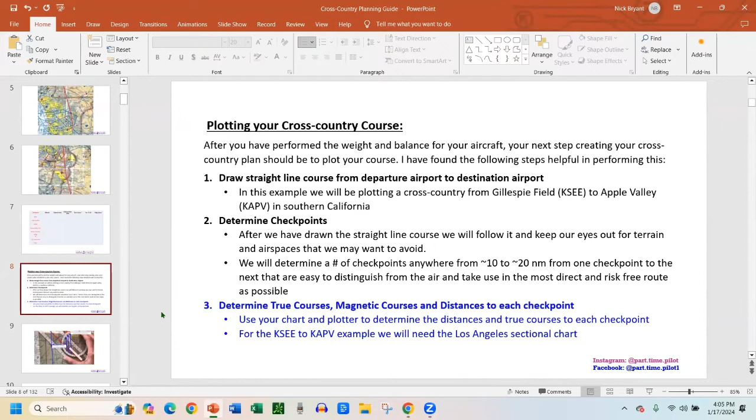And the examiner wants to know that you can do it the old school way. So we measure on the plotter. When we measure this course, that's going to give us our true course when we're measuring straight off our sectional or terminal area chart. So we do that for each leg of flight, we put in our true course.

And again, I'm flying through this. I know if you have questions on anything specific on one of these steps, just remember it, write it down, put it in the chat, and I'll try and get to it at the end.

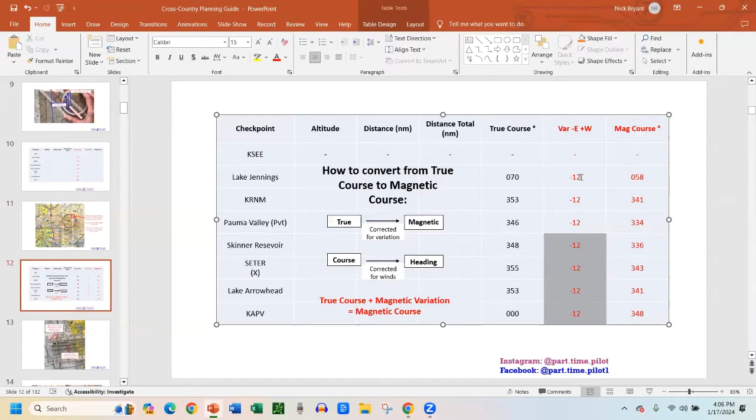Then we got to convert to magnetic course. So we find what the variation is using these isogonic lines of the chart. This one says 12 east. So we subtract 12 from our true course to get our magnetic course. So here we have the true course, then the variation, and then the magnetic course.

Okay, and then next thing we do is we want to measure our distances. So we just want to make sure that we're using the right scale on our plotter tool. As you can see, there's a bunch of different scales. There's a terminal area scale—you can hardly see it, but that's this one on the inside. Then you've got nautical miles here, you've got a sectional, and then the WAC. So you just want to make sure if you're looking for nautical miles, which we are on a sectional chart, then you want to use this top scale up here. So just make sure you have the right scale.

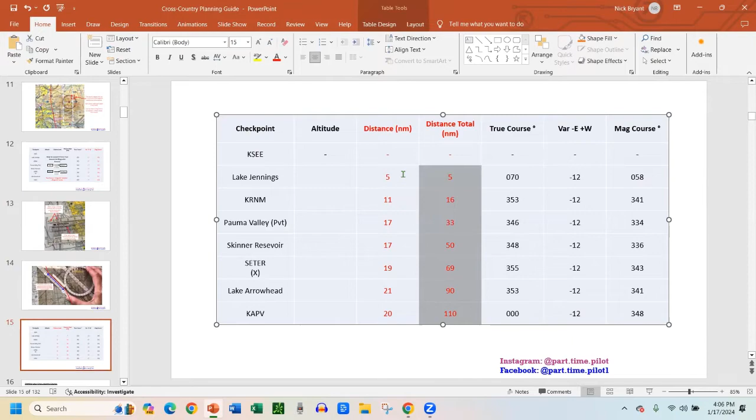And then you can do the same thing for each leg, but now we're measuring distances, and we put those distances into our NavLog. And then we also want to do an accumulation of the distances, right? So this one is always the total distance you've flown. So when we're at Pauma Valley, it's 17 nautical miles from KRNM to Pauma Valley Private, but we've flown a total of 33 from our takeoff at KSEE.

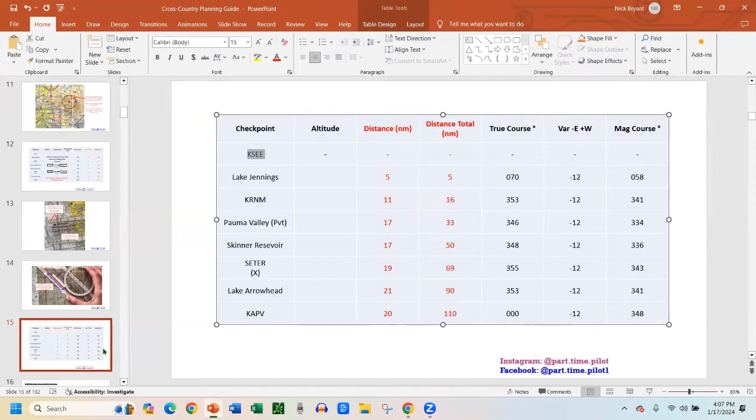All right, next thing, we want to figure out what our altitude is. So we're going to look at things like airspace and terrain, and maybe the ability to glide out to bad terrain if we lose an engine, stuff like that. Those are things to consider. So this is just me going over the path, right, and picking some altitudes.

Right here, originally I say at Lake Jennings that we want to climb and stay below 3,800. That's because there's a Class Bravo. If you just got clearance or flight following, you could go right through that and climb straight to 8,500. I talk about this in more detail here. That's kind of your choice, right?

Some student pilots—you have to have an endorsement to fly in Class Bravo solo. So that's kind of why I say you might not have that. So you might need to stay out of Class Bravo, but it would obviously be easier to just get that Class Bravo clearance and flight following. But that's why I said that there.

All right, then what I like to do—and this is a huge trick that I learned—let me just check the chat here, make sure no questions or issues.

Okay, cool. All right, so now that we have the total distance—this is our total distance number for our whole flight—I like to do an estimation of the fuel that we're going to need. We'll get an exact calculation later, but this is just an estimation. The reason I do this now is because before we do all this work calculating our performance, we want to know if we need a fuel stop or not. So if our fuel tanks hold 48 usable gallons, we want to know how much we're going to need to make this right now. If it's over that 48 gallons, including reserves and all that, then we know we're going to have to stop somewhere to get fuel. That means adding in checkpoints somewhere in here.

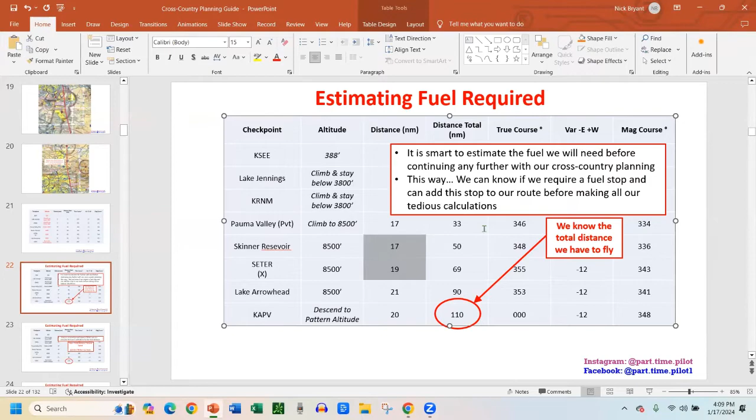And descents and climb back up—it's going to change a bunch of things. It's going to change these numbers and these numbers, so you're going to have to redo all of it. So to avoid doing that, I like to just estimate the fuel. To do that, you can just assume a ground speed, and then use time equals total distance divided by ground speed. Here I estimated a ground speed for the aircraft—like a trainer aircraft—of 95 knots. The slower the ground speed, the more conservative your estimation.

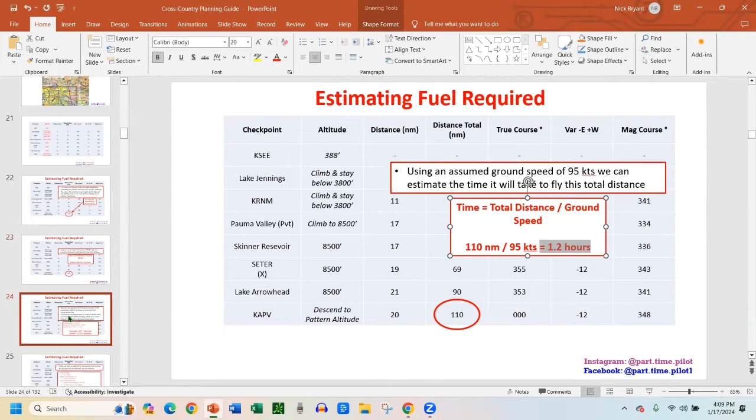So we say it's going to take us about 1.2 hours. And for my aircraft, I use an average of 10 gallons per hour. That could be more depending on your aircraft, maybe 12 or 15. Again, you can use a conservative value. So we do 10 gallons per hour times 1.2 hours, which gives us 12 gallons.

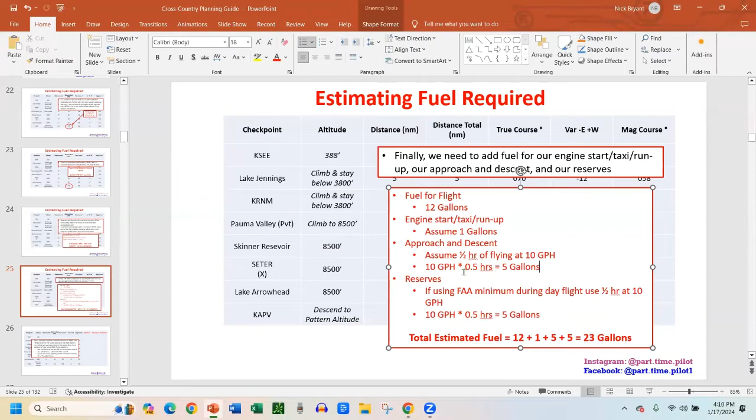Then we add in other things beyond just the flight itself. We want to add about a gallon for engine startup, taxi, run up, approach and descent—so add 5 gallons total, about a half hour. This is what I do; not everyone does this or uses this exact amount, but it's good practice. If you get to an airport and have to stay in the pattern for a while and didn't plan for that, it's good to plan for at least a half hour of flying in the pattern before you land.

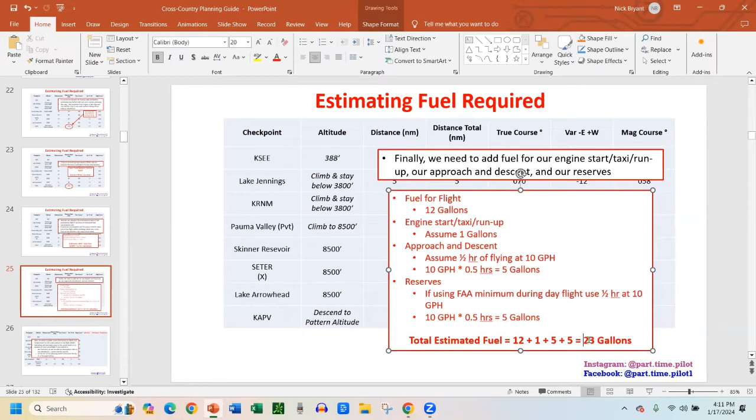And then finally, reserves. You have day reserves of a half hour after reaching your destination in cruise flight, or night reserves of 45 minutes. We're assuming day flight, so that's another 5 gallons. Adding that all up to the 12 we came up with, we need 23 gallons. So if this aircraft can carry 48 usable gallons, we're good—we know before doing all this work that we don't need a fuel stop.

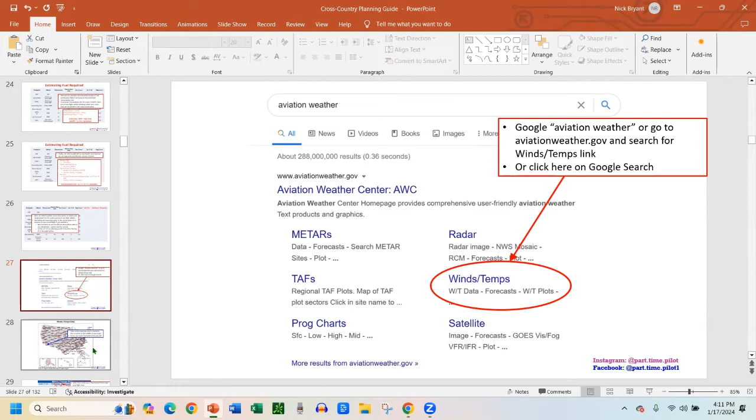Now we would gather winds and temperatures. These screenshots are a little old—the aviationweather.gov site has been updated and is a lot cleaner now. So these are kind of old, but the same data exists; just how you find it on the website is a little different.

So we get winds aloft data. We're flying in the San Diego region here, and we look at our altitude. We may have to interpolate a little bit to get our winds and temps, and then we fill that in for our cruise flight. That was for 8,500 feet.

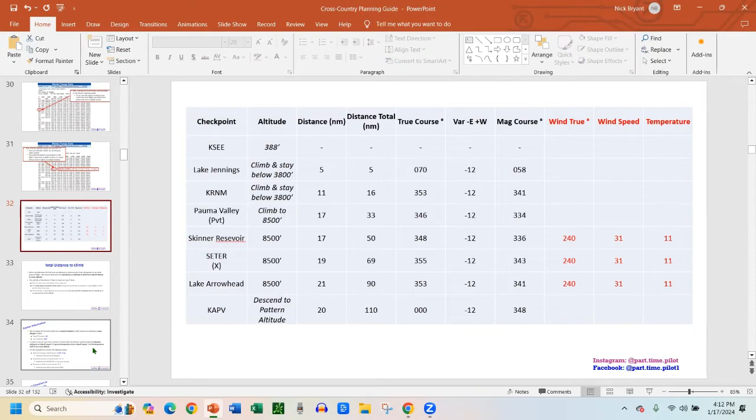We don't know our altitudes quite yet before that, because we'll be climbing. So we may have to do some interpolation—say at Pauma Valley we'll be about 6,500, and at KRNM about 3,000. I show some ways to do this in detail in this guide, but we're not going to cover them here. If you have questions, ask me later or send an email about how I like to do it. Anyway, now we're going to start our performance calculation.

We want to see how long it takes us to climb, because we need to know that as well as the fuel it'll take to climb. So we start using our performance charts.

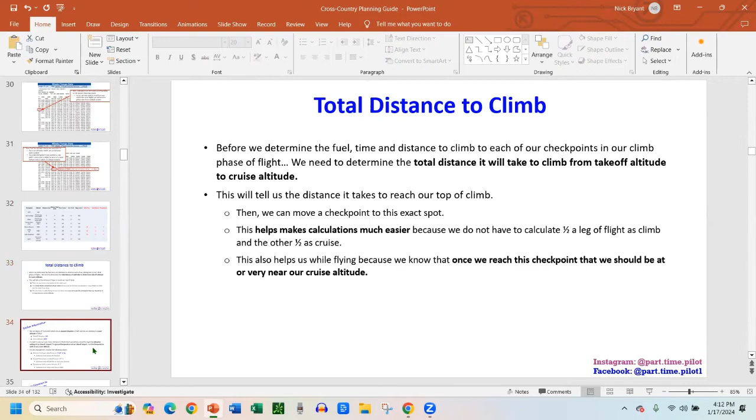The first thing we need is our information. Our takeoff elevation is 388 feet, at KSEE Gillespie Field, east of San Diego, and a cruise altitude of 8,500 feet. We need these to be in pressure altitudes, so we'll assume this is our pressure altitude for now.

We also need the temperatures for our performance calculations. Let's assume these temperatures, which are a little hotter—I used some funky, non-standard temperatures here. You'll see why later in the examples. Obviously it's not always 11 degrees Celsius up at 8,500 feet; that's pretty hot for up there, but I wanted to do something different, and we'll get to that later.

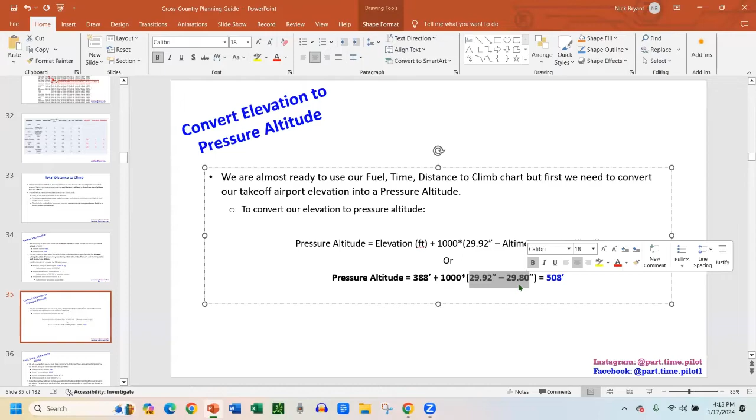So first we want to get everything into pressure altitude. Our elevation is not yet a pressure altitude, so to convert it you can use figure 7 in the Airman Knowledge Testing Supplement, which has a pressure altitude conversion factor, or use this equation: your elevation plus 1,000 times the standard altimeter setting minus the actual expected altimeter setting. Doing inside the parentheses first, we get 0.12, multiply by 1,000, that gives us 120. We add that to 388, and we get 508—that's our pressure altitude.

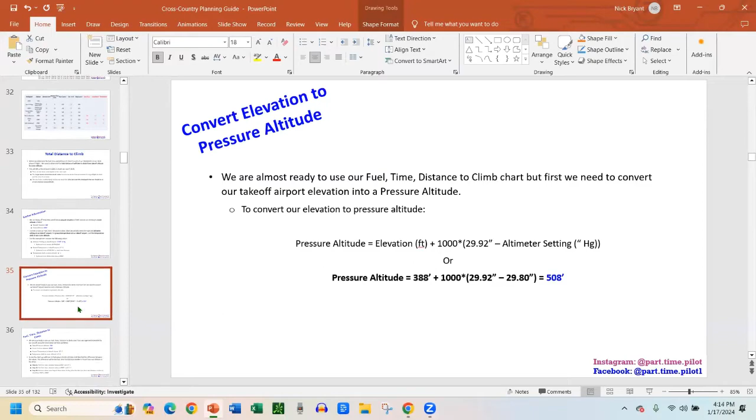Now that we have our pressure altitudes, we have everything we need—the pressure altitudes at our takeoff and cruise altitude, and the temperatures at takeoff and cruise altitudes. So now we pull out our fuel, time, and distance to climb chart.

Now I'm going to work through these in an example here, so I'm going to switch the screen. Let me know if everyone can still see this.

I just want to make sure. Yes, okay, cool, all right.

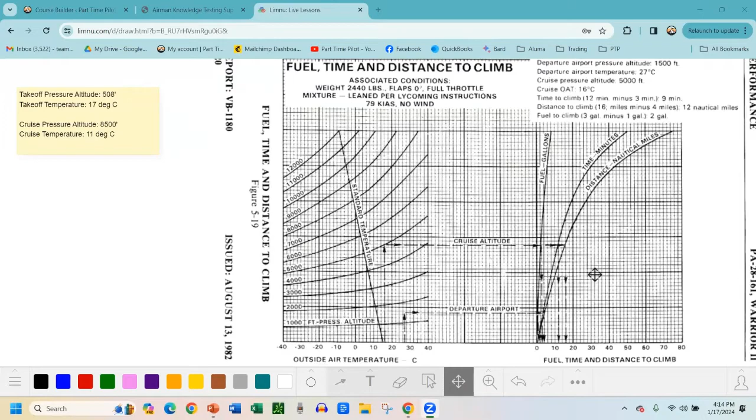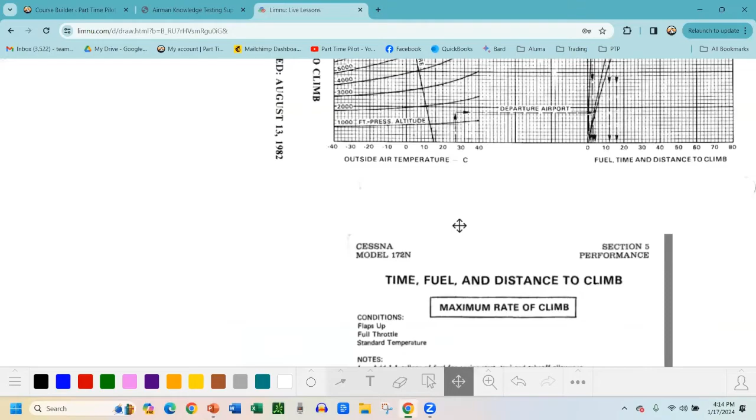Now this is for a Cherokee Warrior, this is what the chart looks like. On the FAA written exam, they might have you do a chart like this, or they might have you do a chart like this, which is just like a table, which is a Cessna, since I believe Cessnas use that format. So we're going to do an example using both of them, since you might see both on the written exam or in real life. So what we have to do is do this twice.

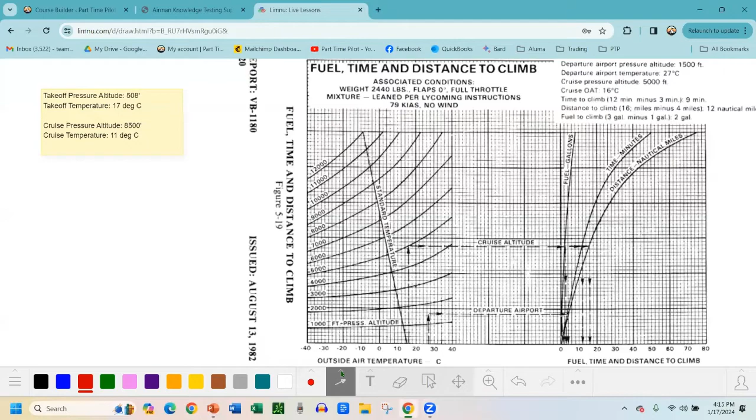I'm going to try my best to draw some lines here. Let's see here... all right, hang with me here. There we go, all right. So let's do a line, let's do a red line.

So we want to do this for our takeoff elevation and temperature. We're going to follow these dashed lines, which are examples, and up here it tells you some information on how to use it. First we start over here on the bottom axis, the outside air temperature in Celsius. We want to find 17 degrees Celsius, which is about right here.

Then we draw a line straight up using these grid lines until we reach 8,500 feet on these curvy lines. This one is labeled 8,000 here, this one is right here, and then we have 9,000 here. So we want to stop at 8,000 - or sorry, I take it back, I'm jumping ahead, that's our cruise altitude.

We're still over here, on our takeoff altitude, which is only 508 feet, so that's actually way down here. We have our 1,000-foot line right here, and the 0 line would basically be down here, so 500 is going to be in between those. So we find 17 degrees and draw a line up to about 500, maybe right there. Then we take that intersection of the 508 foot curved line and our 17 degrees Celsius, and draw a straight line over.

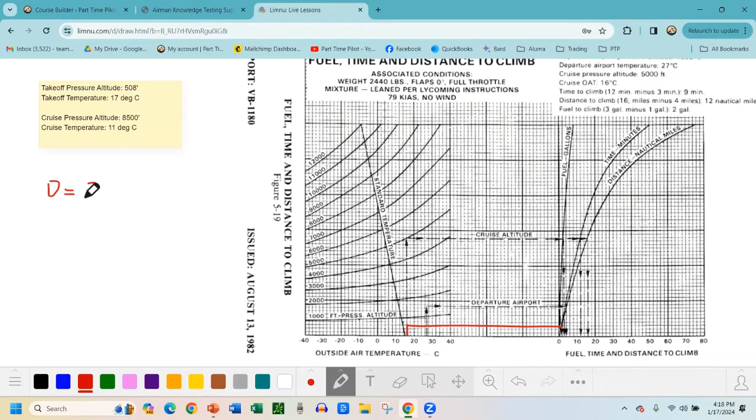So we just do our best to judge that. This outside line is distance, so that should be the most - I'm going to say that's about at the 2 line, so distance is 2. Then time is our next line, this line right here, and we're going to say it should be a little bit inside the distance curve, so we'll say that's about 1.5. And then fuel is even more, that's almost hugging the line here, so we're going to call fuel 0.5, basically almost 0, but we know we'll use some fuel.

Okay, so this is for our takeoff up here. Now we want to do this same thing for cruise - let me do a different color. So now we're going to do cruise, we're going to get a distance, a time, and a fuel. Let me erase these here, we'll use blue, and do this again but for the cruise values.

So now we do the cruise temperature, which is 11 degrees, and we go up to the cruise pressure altitude of 8,500. Starting at 11 degrees, which is about right here, we go up to about right between the 8,000 and 9,000 lines, which is about right here. From there we do a straight line over - and I know that's not a straight line.

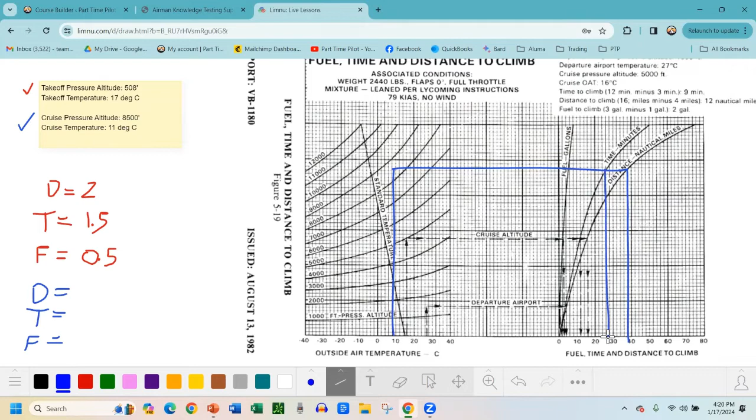Next, we just draw a straight line down so we can read off each intersection. So distance is going to be about 38. Time is going to be about 27. And then for fuel, you just got to make sure you're not crossing grid lines, which can be frustrating. It looks like fuel is about 5.

All right, so let's write these down. Fuel is 5, and time we said was 27. As you can see, it's easy to make mistakes if you rush and draw your line crooked, because these are so close together. So just do your best and always err on the side of being conservative.

When you're actually planning this for an actual flight, now we have values at 508 feet and values at 8,500 feet. We want to know the fuel, time, and distance it takes to climb from 508 feet to 8,500 feet. So we want the difference between these two sets of values.

So we want to subtract 38 by 2 to get 36. Then we want to subtract 27 by 1.5 to get 25.5. And then for fuel, we want to subtract 5 by 0.5 to get 4.5. So the units are: this is gallons, this is minutes, and this is nautical miles.

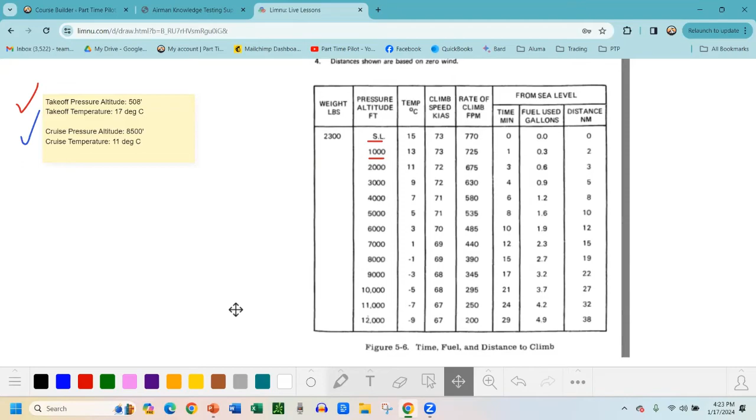It's in a different format, right? It's in this table. First of all, we want to find 508 feet in this column here. Obviously, we just have sea level and 1,000. That's akin to these curved lines, right? So we want to kind of interpolate between these.

We can just, because 500 is directly in between them, that'll be easy. Now, our temperature—this is where this chart lacks a little bit. We only can choose from one temperature. So if our temperature isn't really standard, like it lists here, these are the standard temperatures, what do we do?

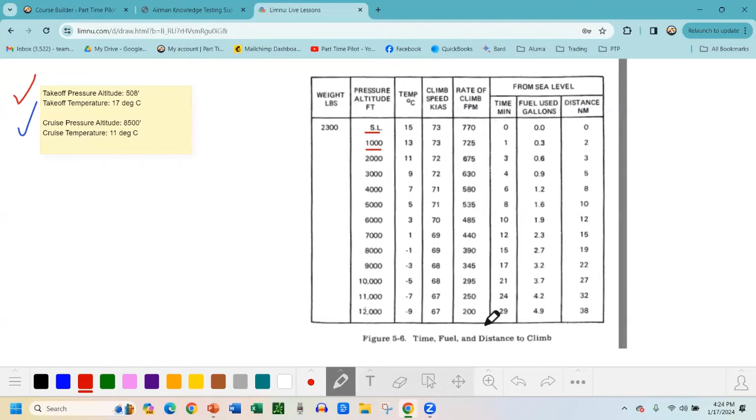Now, some aircraft POHs or approved flight manuals will have, for each 10 degrees above standard, add blah, blah, blah, a temperature correction factor. That's why these other charts are more accurate, because we can actually choose our exact temperature. Anyways, we are stuck with what we have here.

So we're just not going to really worry about temperature. It's a little bit warmer, so our performance will be a little bit worse. We just have to keep that in mind, thinking of density altitude. So we're just going to go here, kind of in the middle. One thing that's nice is it gives us a rate of climb in feet per minute.

And then for time here, we're going to do like 0.5. Fuel is going to be like between 0 and 0.3, so that'll be fuel will be 0.15 if we divide that in half. And then distance is going to be 1, because we're interpolating between 0 and 2.

All right, now we're going to do the cruise values. So we're between 8,000 and 9,000, so we're right here in the middle again, between two curves.

Temperature says it should be, if it was standard, -2. Obviously, we're 13 degrees hotter than that, so we really should be applying a correction factor, because again our performance is going to be worse. But for this case, we don't have that, so we're not going to do anything. We're just going to keep it simple for this example.

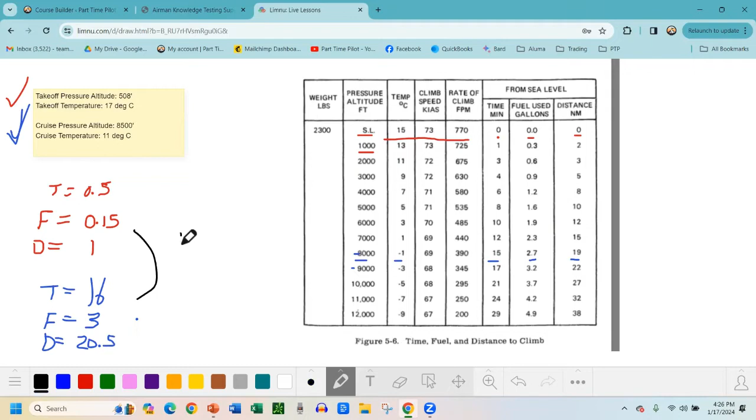And then we would do the same thing. We find the difference between these two. So time, we would have 16 minus 0.5, the difference between the two times, 15.5. And again, this is minutes. And then we would do fuel.

And so that's the difference between 3 and 0.15. So it's like, what, 2.85. We round that up to 2.9. We always want to be conservative with fuel. And that's gallons. And then distance, we have 20.5 and 1. So we subtract 20.5 by 1, and we get 19.5. And that's nautical miles. All right, so that is how you would do it on a Cessna.

All right, any questions here on climb performance, either using the table or the chart?

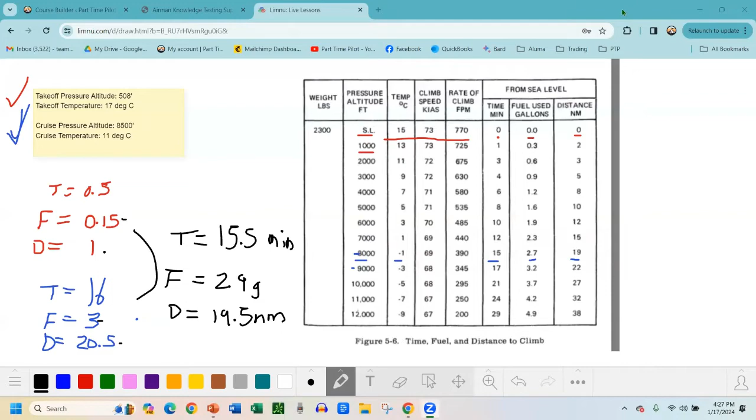Scott says, can you make your screen a full screen shot? I worry that I've had this happen before. Can you guys still all see that? Yes, okay. All right. Hopefully it still records. I've had it happen before where I was doing like a PowerPoint presentation and it wasn't recording anything.

Okay, Victor says, do we take wind into consideration for takeoff and climb? What about weight? Does it affect the takeoff and climb?

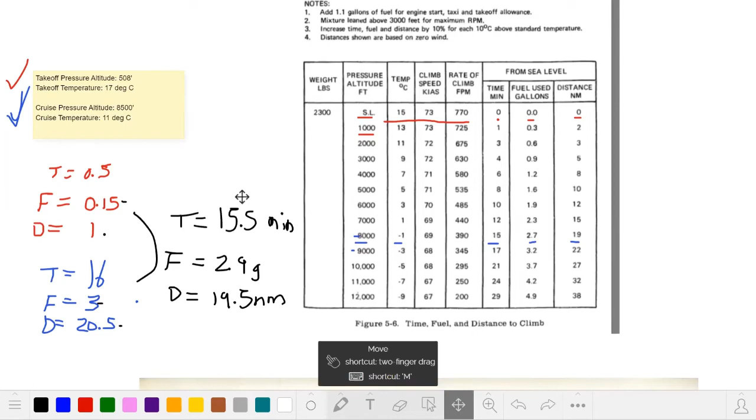So for climb, we usually don't consider anything other than, as you can see here, we have a weight listed. It's an assumed weight, which is usually near kind of what they would expect you to take off with, like almost full tanks. But climb performance charts generally do not take into account weight or wind. They simply keep it to temperature and pressure altitude. Wind would affect your ground speed and time and stuff like that. So we do eventually take into effect wind.

And then for takeoff, we do take into effect the weight and the wind. So for our takeoff ground roll distance, or our landing ground roll distance, we will use weight and wind. And I hope to get that today to show you guys that performance chart. But for climb performance charts, these aircraft manufacturers usually don't consider that.

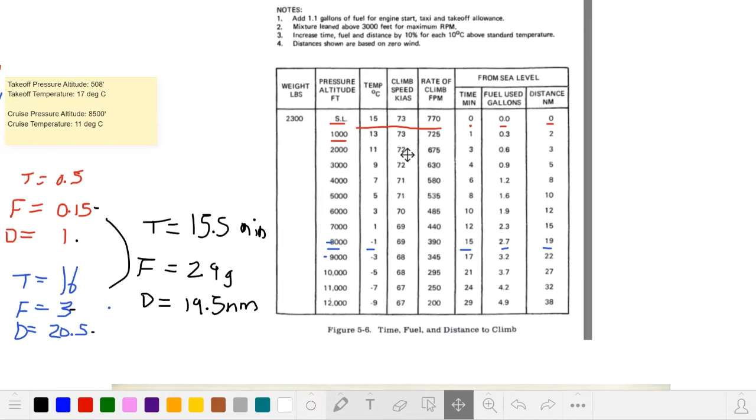For our numbers, should we not look at notes and adjust as per notes? For the Cessna chart, I mean. Should we not look at notes and adjust? Oh, these notes up here. Yeah, oh yeah, there are notes. Oh, thank you, yeah, that's what I was talking about. I didn't realize they were up here. Yeah, so I didn't do that. I will show you how to do that in another example.

But yeah, so we would increase our time, fuel, and distance 10% for each 10 degrees above standard, right? So we're about 12, what would we say, 12 or 13 degrees above standard. So I would increase everything by about 12 or 13%. So I would increase this, so you just multiply that by 1.13 to increase it by 13%. Same with that. Yeah, great call.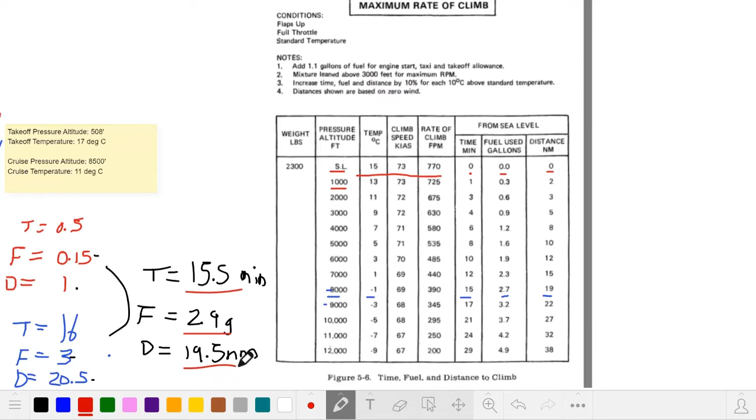I didn't see these up here. I thought I had a picture without that. So thank you. All right, let me continue on. Good questions. If you have any more, please ask them and I'll get to them when I can.

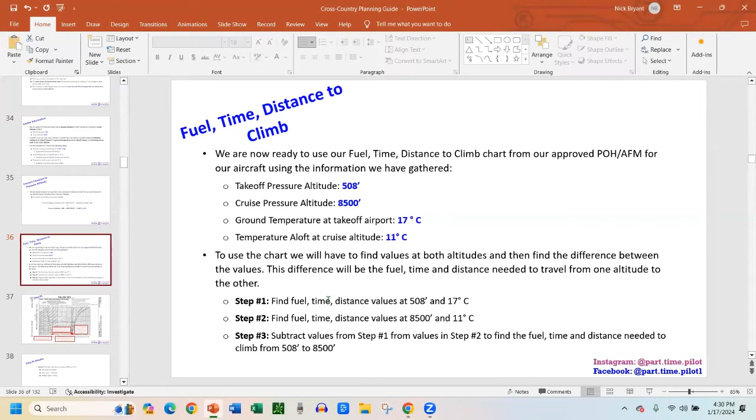All right, let's see here. Back to this here. Okay. All right, so we've done that. We've done this stuff here.

All right, now what I'm going through here is I'm saying now that we know our total distance to climb, it would be nice to have a checkpoint at that distance so that we know when we reach that checkpoint, that should be about when we're done climbing. Plus, it makes things easier in that we can have everything before that checkpoint in our climb phase of flight and everything after that checkpoint in a cruise phase of flight. So that's what I like to do.

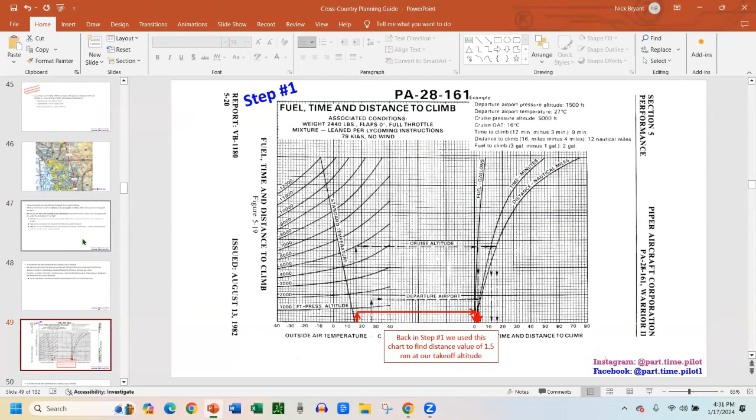I'm not going to show us how to do it here, but basically I just found another checkpoint that would match our end of climb. So I changed that here. And then we can figure out what at each checkpoint, what altitude we'll be at if we were to just climb all the way to that. So that's what I'm doing here. Again, I'm not going to cover that detail.

You can also take your climb rate from your AFM POH, if you have that, and say, okay, well, I know it's 5 nautical miles and my aircraft climb rate is 250 feet per nautical mile or something like that. And you can use that to figure out the altitudes here that you'll be at these checkpoints. So a couple ways to do it. But again, like I said, we're not going to get into the weeds on that. I want to make sure.

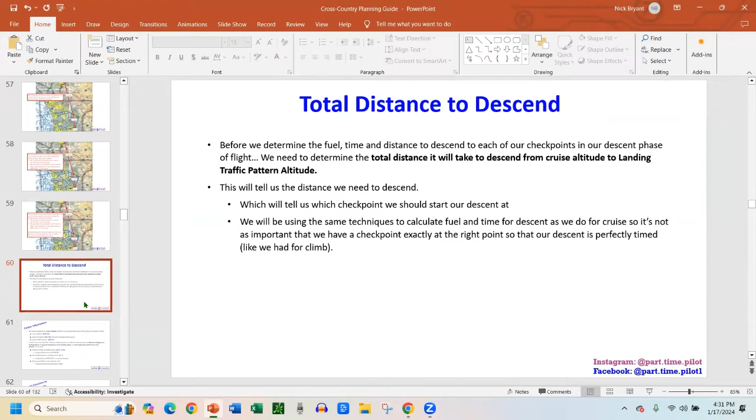Okay, now total distance to descend, just like climb, we have charts on fuel, time, and distance to descend charts. Now, not usually does the FAA ask about this. Not all aircraft have charts for descent.

Not all charts have descent charts, but if you did, it would be the same exact process. So we would do it once for cruise, but this time we're starting at cruise. So cruise out at 11 degrees and 8,500, so that's about right there.

And then line over, right, and then you get your fuel time and distance. Then you do it again at the pattern altitude of where I'm landing - I call that my bottom of descent. For this example, we did about 4,000 feet and 25 degrees Celsius, so we go to here, 4,000 feet, and do that over. Then we mark down the fuel time distance, subtract the two, find the differences, and we get our fuel time and distance values for our descent.

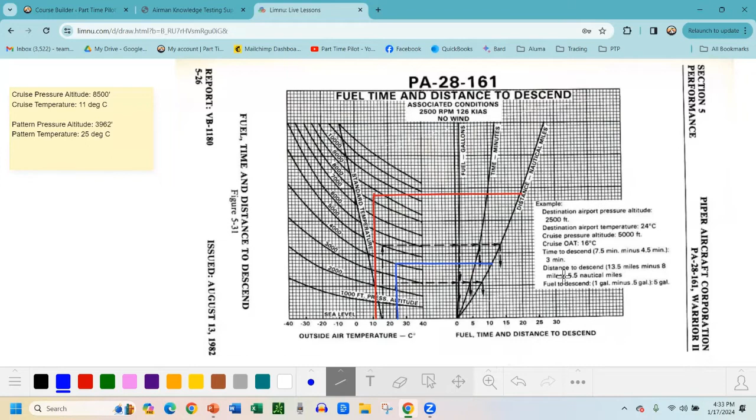A lot of people, for fuel on descent, just calculate it the same way as cruise because it's more conservative - you burn a little more on cruise. That's actually how I like to do it as well, rather than using these charts, because these charts have some error and I'd rather be conservative. I'm not going to show you the whole thing, but it's the same type of chart for descent if you're flying an aircraft that uses that performance chart.

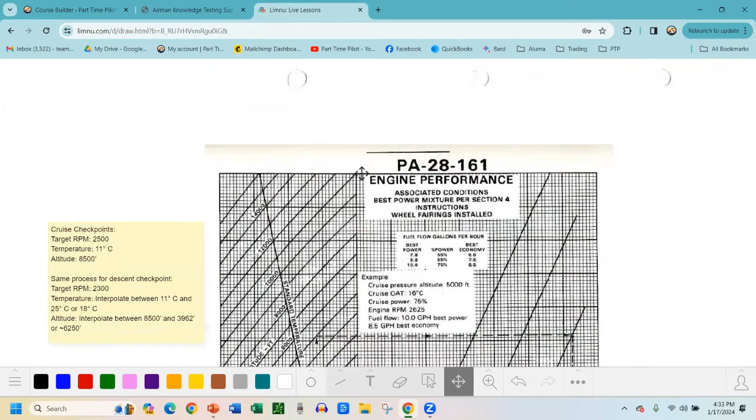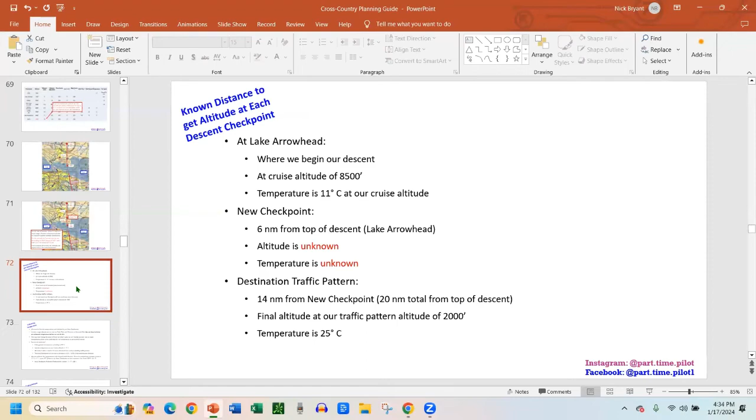All right, let's go back here, continuing on our plan. So now we know the distance to descend. I'm also choosing a checkpoint to start my descent at, just like I did at climb - I like to have checkpoints at the end of my climb and a checkpoint right where I should start my descent, so I know. It makes things easier, dividing your flight up like that. So that's what I'm doing here, then finding the altitudes at each checkpoint.

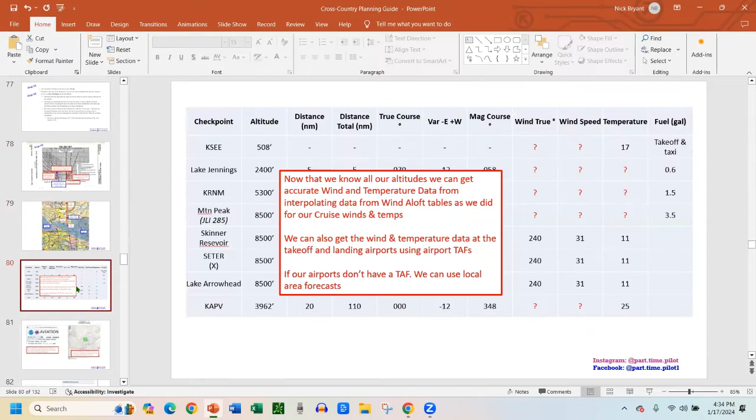You could also use a descent rate to do that as well. Now this has changed - with aviationweather.gov, you'd use the graphical area forecast tool, or GFA. I used to use this chart, which I really liked, a time chart of all this stuff. I don't think they have this anymore, unfortunately, but you can get the same data using the GFA tool.

So this is old, but we're basically getting our winds, our temperatures, and wind speed at ground level. We would also use winds aloft, which I didn't show, to get data at like 5,000 feet. Anything above about 3,000 feet, we can use winds aloft, and anything below 3,000 feet, we can use surface information.

And what I like to do is interpolate a little bit to... sorry, can you guys all still hear me? I just want to make sure. I had... okay, cutting in and out. Yeah, I just had a note that my internet was unstable, so sorry, hopefully that gets better.

For example, for this area, there was winds aloft at 3,000 feet, so we would use surface analysis, surface temperatures and surface wind data for the surface. Then we would interpolate between the 3,000 and 6,000 winds aloft for the KRNM checkpoint, and here we would interpolate between the 3,000 winds aloft and the surface for our winds, wind speed, and temperatures.

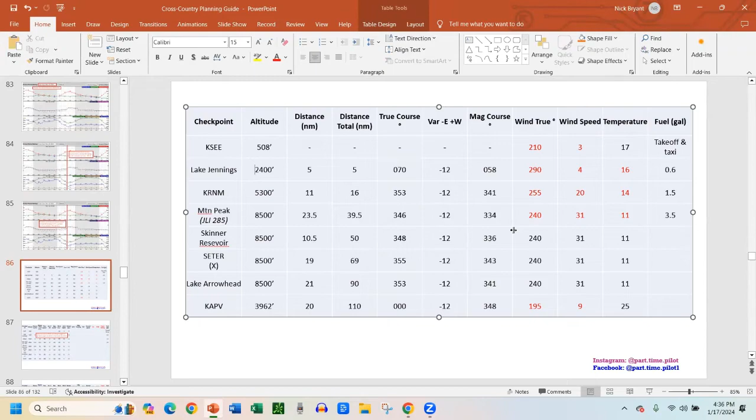Okay, seems good now, thanks guys. All right, let's see here, continue on. So we gather all our wind and temperature data. What I'm explaining here is how I like to do it, and this is why I divide it into a climb phase of flight and a cruise phase of flight.

So when we climb - if anybody's had a flight lesson yet - you take off and you usually climb at either the best angle or best rate of climb. So you usually target an indicated airspeed. For a Cherokee Warrior, the best rate of climb is 79 knots.

So we know we're targeting an indicated airspeed. That's what we start with, so that's what I put here. We're going to fly 79 knots.

Now in cruise, the way I do it is I usually just set an RPM and whatever airspeed I get, I get. I'm usually not saying I want to fly 120 indicated or something like that. So we usually start with an RPM when we're in cruise flight.

Same thing with descent. If we want to descend, we'll back off on the RPM a little bit and just descend. We don't really target an airspeed until we get back into the pattern for landing, then we want to get into our approach airspeeds and all that.

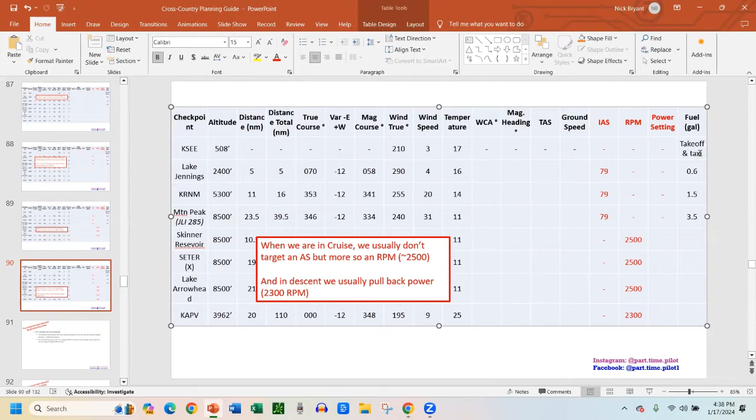So our next goal is a true airspeed. That'll get us to a ground speed. And once we have ground speed, we can use distance and ground speed to get a time to each checkpoint. Once we have time to each checkpoint, we can get fuel to each checkpoint, to the destination we're going.

So the next step is true airspeed. We can do it two different ways. When we know the indicated airspeed that we're flying at, like in climb, where we want to target 79 knots of indicated airspeed, that's when we simply use our E6B.

Now I'm not going to show you this today, we're going to show you this next week because we're going to do all the E6Bs in one thing. But you would simply use the airspeed correction to go from an indicated airspeed to a true airspeed. In this example we assume indicated is the same as calibrated airspeed, but technically you go from calibrated airspeed to true airspeed. We'll talk about this next week.

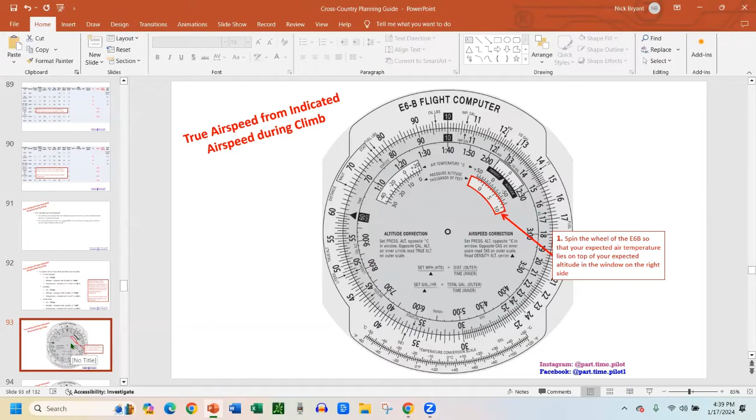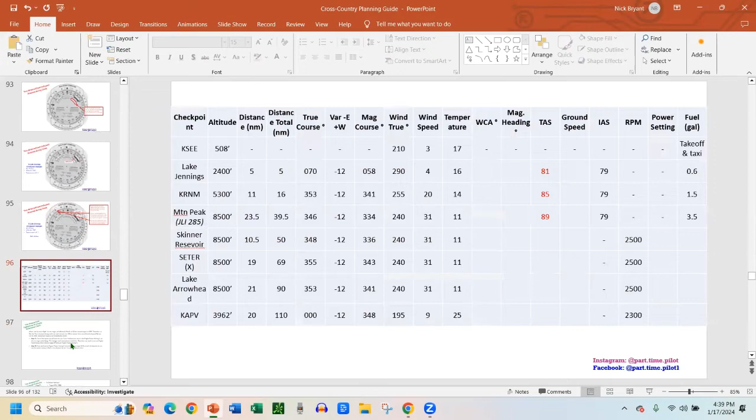So this is in climb, this is how we come up with our true airspeed in climb, we'd use our E6B. Now for cruise, we don't know an indicated airspeed, so we're starting with RPM. So how do we do it in cruise? Well, we can use performance charts from our AFM or POH.

The first thing we can do is convert this targeted RPM to an engine power setting, and this power setting depends on the conditions we're in, the temperature and the altitude. This is the Cherokee Warrior PA-28-161 engine performance chart, and I'm going to show you an example of how to use it. We're going to use that to get a power setting in terms of percentage, and then turn around and use that percentage on our best power cruise performance chart to get a true airspeed. Let's show you how to do that.

So here's the engine performance chart right here. Let's do the line, we'll do red. We have our cruise checkpoints over here: a target RPM of 2,500, temperature of 11 degrees Celsius, and altitude of 8,500 feet.

We would do the same process for our descent checkpoint, where we lowered our RPM to 2,300. For the temperature and altitude, since they're obviously changing as we descend, I like to just take the middle temperature and the middle altitude.

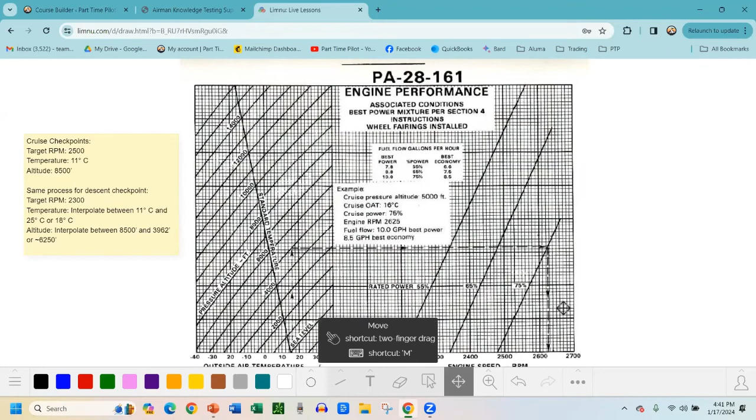But we're just going to do this chart once for the sake of time, just for the cruise checkpoints, though you'd do it again every time you change RPM. Just like the climb performance chart, we find 11 degrees on the temperature scale down here, and draw a line up until we meet 8,500 feet. About 11 here, 8,500 is about here, that's as straight a line as I'm going to get. And then from there we draw a horizontal line.

Now we want to find which one of these diagonal lines intersects with our RPM. Our RPM for cruise is 2,500, so we draw a straight line up, and our intersection is right here. Now we eyeball this and say, okay, what diagonal line would this intersection be on, between 55 here and 65 here?

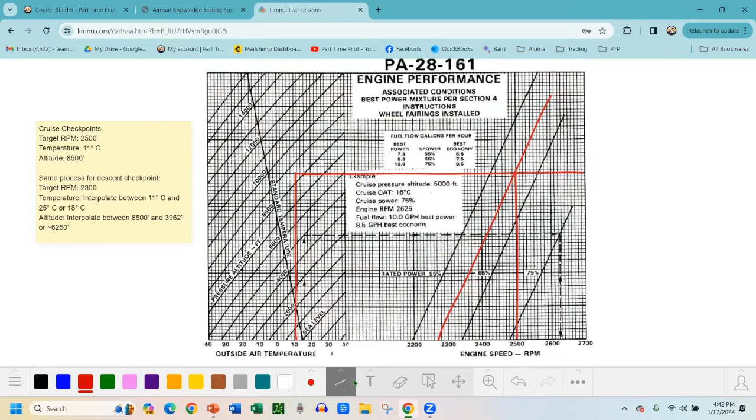You just kind of eyeball it, make sure the line is parallel. This is almost directly in between, maybe a little bit closer to 65. So let's call that 61% for our power setting for our cruise.

Now that we have that, we can use our cruise performance chart, which needs that percentage of power — that's why we had to do that. So now we have our target power setting of 61%, with the same temperature and same altitude.

We would do this again for descent. If we did it for descent at 2,300 RPM, with our middle temperature and middle altitude, we'd get a target power setting of about 51%. We would do this again, but here we're just going to redo the cruise calculation for the sake of time.

So again, we find 11 degrees here, we go up to 8,500. That looks decently straight to me. And then we draw a horizontal line over.

Now we see there's a 55%, 65%, and 75% lines. We want to draw where our 61% line would be, so it's going to be about in the middle of 55 and 65%, maybe a little bit closer to the 65% line. Make sure it's parallel with the other lines.

Then at this intersection, we draw a straight line down to our true airspeed, which is about 111 knots. Now there's a note here: this assumes you have wheel fairings, which are shrouds that go over the wheels to make them more aerodynamic for better performance. If wheel fairings are not installed, subtract 7 knots.

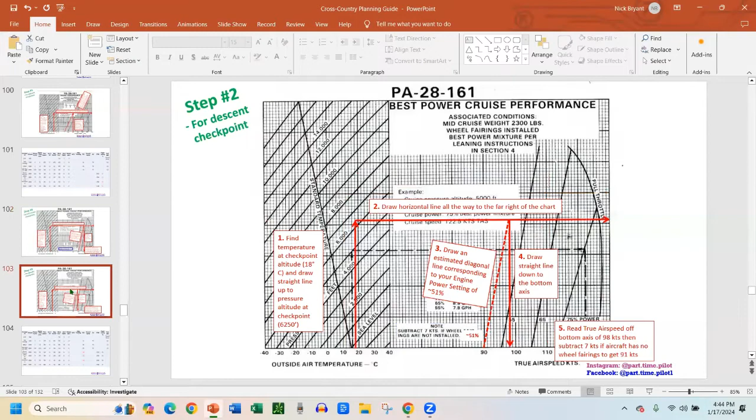Let's assume we don't have wheel fairings, because a lot of aircraft at flight training schools do not. So let's subtract 7 knots from our 111, giving us 104 knots true airspeed. Let me flip over here — so we put in 104 knots, and we do the same for our descent, about 91 knots, and now we have our true airspeeds.

Now we can use the wind data and our true airspeeds to get our ground speed, our wind correction angle, and finally our magnetic headings. For that we'd use the wind side of the E6B, which we'll do next week. But do you guys have any questions before I move on?

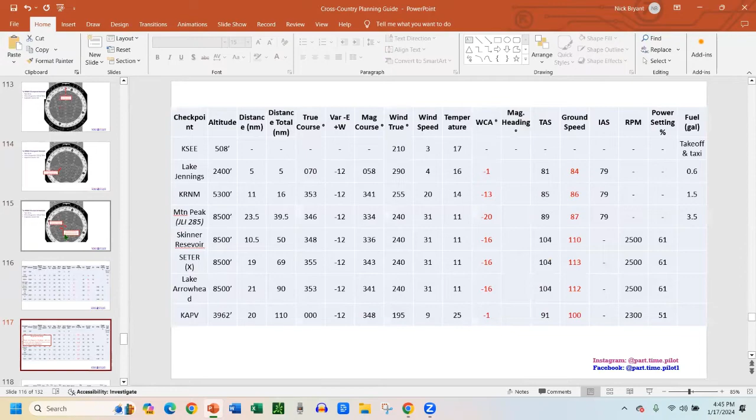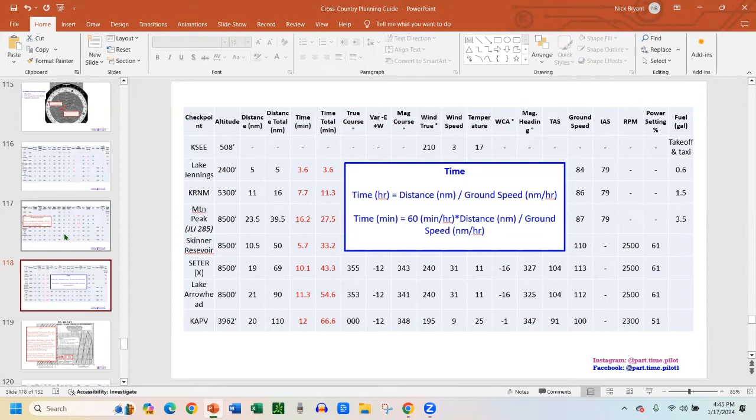Real quick before I take your questions, here's what we do in the next steps. Now that we have our true airspeeds, we use that and the wind at each checkpoint to find, with our courses, our wind correction angle, magnetic headings, and ground speed. Once we have ground speed, we can find time using time equals distance over ground speed. Then once we have time, we use a fuel consumption rate.

For a Cherokee Warrior, the fuel consumption rate is listed on the best power cruise performance chart for cruise — might be listed elsewhere for your aircraft — and it lists fuel consumption rates per engine power setting. Since we know our engine power setting was 61% in cruise, we can interpolate about an 8.4 gallons per hour fuel consumption rate. We take that rate, multiply by the time in hours, and get the fuel we're using.

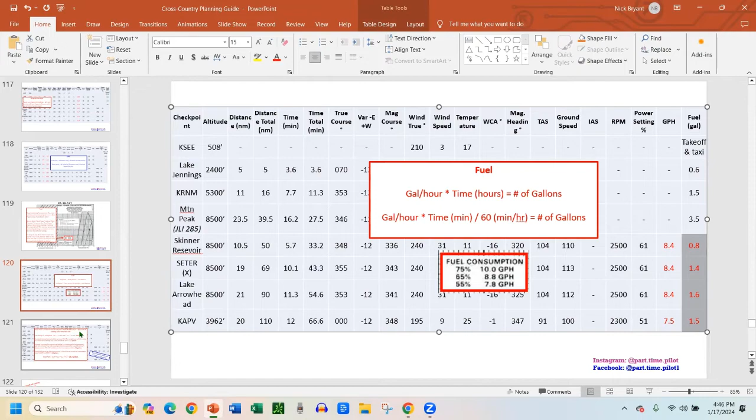That's how you come up with fuel and everything like that. The E6B parts we will cover next week, but there's one more thing we're going to get to: takeoff and landing distances, because those use performance charts. We haven't really talked about those yet, but before I do, I want to see if you guys have any questions.

Luke asks: I apologize if this was explained, I'm at work so I missed a few minutes. Where did we get the target cruise power of 61% from? Is there a chart to find that?

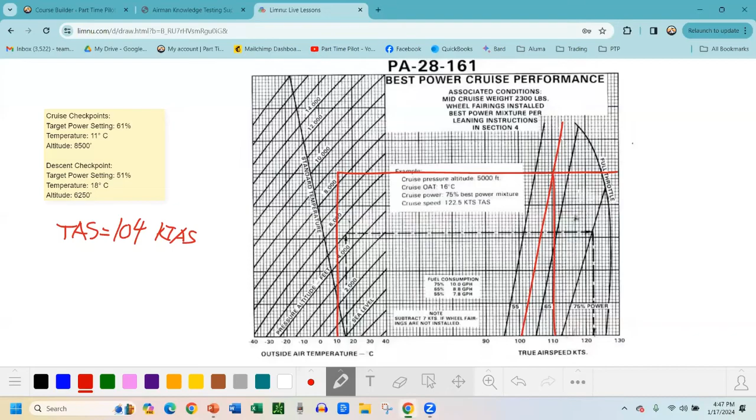Yes, it depends on your aircraft, but for a Cherokee Warrior we have an engine performance chart. For any certain temperature, pressure altitude, and RPM, it gives you a power setting in terms of percentage. That's what we did, because we have the tachometer when flying. In cruise flight, usually how most people teach it and how I learned it, you back off the throttle a bit rather than going full throttle. We're not too worried about saving fuel, though you may lean the mixture at altitude, but you usually target an RPM. So we take that targeted RPM of 2,500 at our temperature and pressure altitude to get a rated power percentage, and then use that in our best power cruise performance chart.

Yep, no problem. Any other questions?

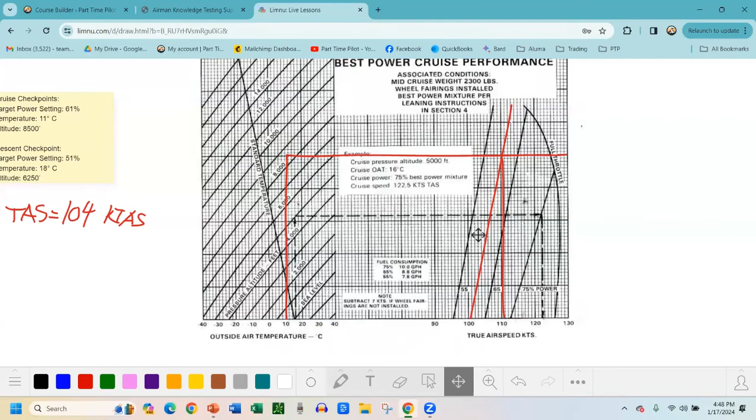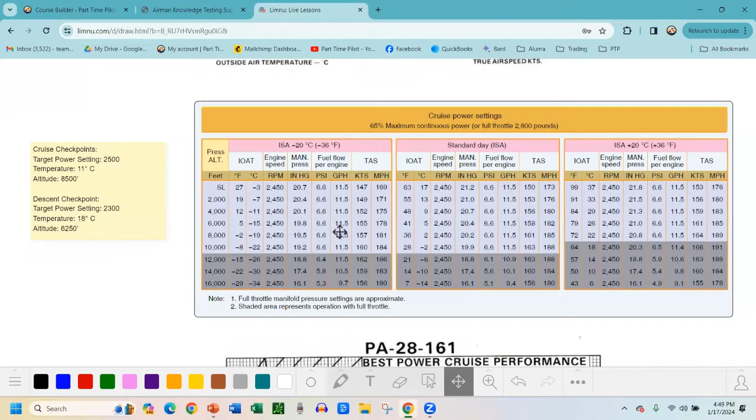All right, oh wait, one more thing before we move on. A cruise power chart may also look like this. I always fly Cherokee Warriors, but I believe a Cessna chart looks like this, and this is what you might see on the FAA written exam. It's very similar, so sorry, I kind of jumped ahead and forgot about this, but I do want to show you this.

It has three sections here for temperature: a standard day temperature, a -20 degree standard day, and a +20 degree standard day. So that's the first one - you find out which section you are in. Standard temperature is 15 degrees at sea level, and that's Celsius.

At 8,500 feet, with a lapse rate of 2 degrees per 1,000 feet, meaning we drop 2 degrees for every 1,000 feet, by the time we're at 8,500 we've dropped 8.5 times 2 degrees, so we've dropped 17 degrees. Standard temperature, as we saw before, at 8,500 feet should be -2 degrees. But we are at 11 degrees, so we're 13 degrees over standard temperature.

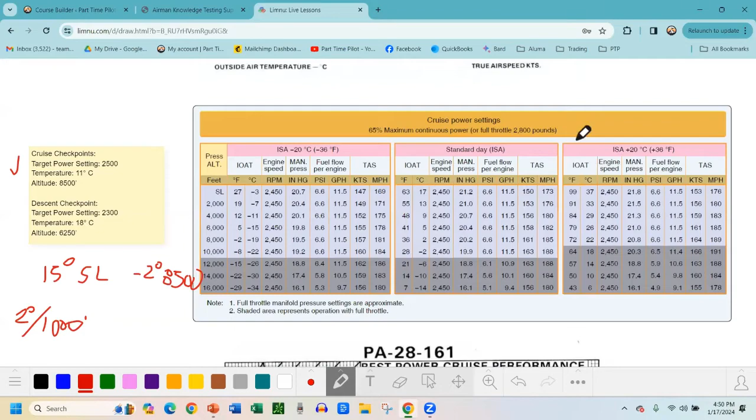So we're kind of in between these two charts. If you want to be real accurate, you could get a value in this chart, then get a value in this chart, and interpolate between standard day and +20 at +13. For this example, we're just going to assume we're ISA +20. That's worse performance, so it's a little more conservative anyway, so that's okay.

The next thing we want to do is pressure altitude here - we're going to find 8,500 feet. Again, a little more interpolating because we only have 8,000 and 10,000, so we're somewhere in between. Then we come over here, follow this line, and we simply find our true airspeed in knots right here: 164. It's 166 at 10,000, so at 8,500 if we interpolate it, it'd be 164 or 165.

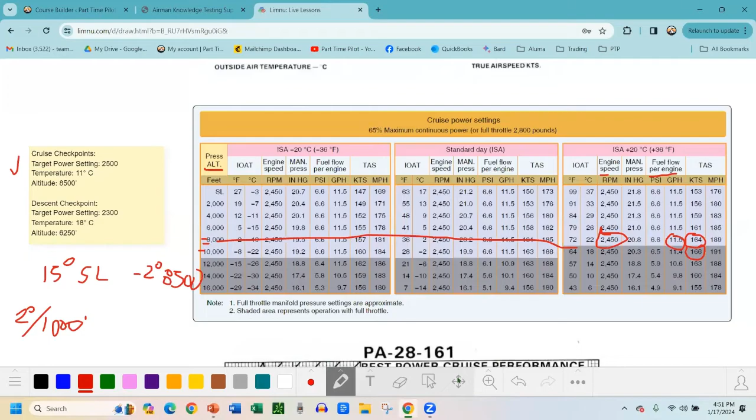That's fine. The nice thing about these charts is you can also get your fuel consumption rate right there to calculate fuel when we get to that, and you also get your engine RPM. All right, sorry about that - I kind of jumped ahead, but that is how you use a chart like that.

And then now, let me see if there's any questions on that.

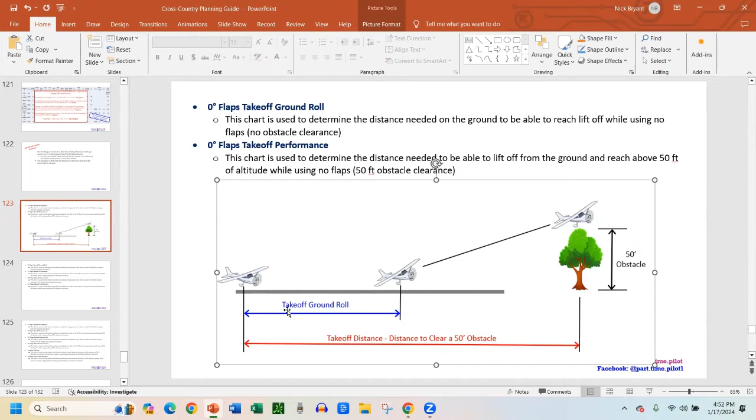And then you also have 0 flaps and full flaps to choose. If you're using full flaps, then you want to use the full flap takeoff ground roll or takeoff distance to clear 50 foot obstacle.

So if you have an obstacle near the runway, which you'd find in the chart supplement or something, or if you should know your runway, if there's a crane or a tree or some terrain, then you want to use takeoff distance to clear 50 foot obstacle, because you want to make sure that you can clear a 50 foot obstacle. And that's this distance.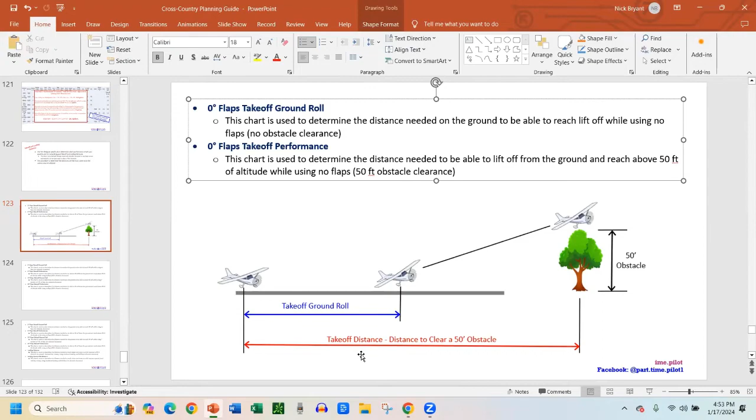This is the distance from where you start to move until where you are 50 feet above the ground, higher than 50 feet above the ground. Sometimes they call that the takeoff performance.

And then you also have, like, a 25 degree flap takeoff option as well. So whether you're using flaps or not for your takeoff, and whether you have an obstacle or not, determines which one we want to use.

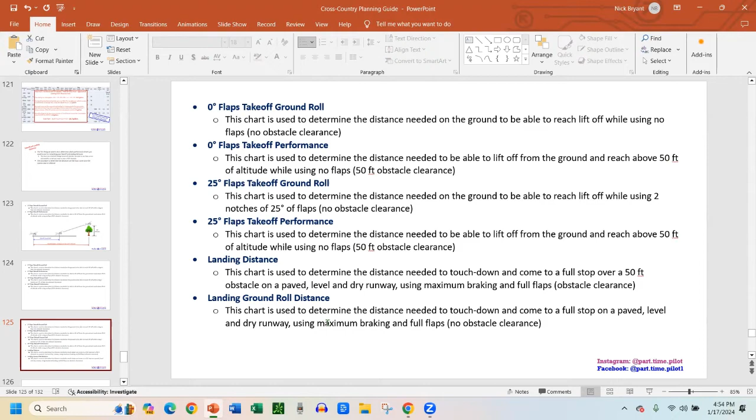And then for landing distance, we have similar things, except no variations for flaps. They just assume you have full flaps on landing. So we have a landing distance, which is shown here. It's right when your wheels touch the ground to when you come to a complete stop.

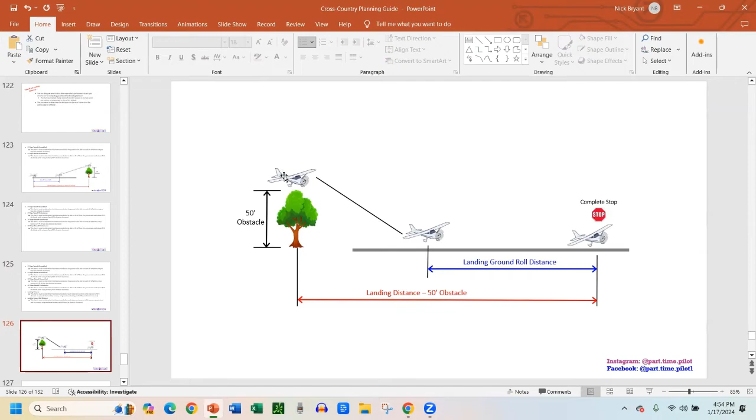That's your landing distance. And then the landing distance over a 50 foot obstacle is from the distance of the 50 foot obstacle all the way to the complete stop. So it's just the reverse of the takeoff ones.

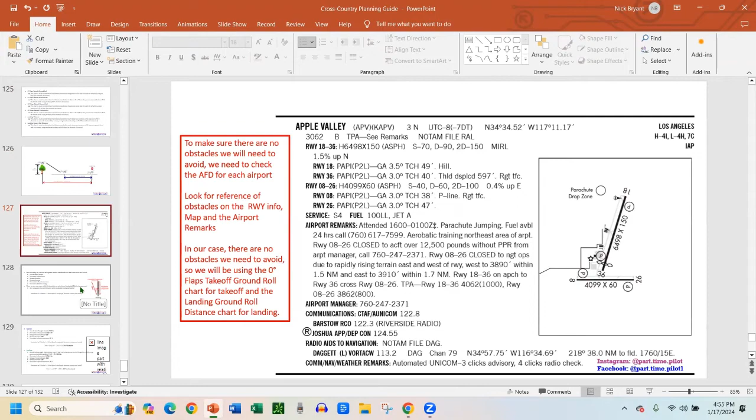And again, it's always safest to just do the distance to clear 50 foot obstacle takeoff distance, to always be conservative.

So one thing we need to know for our takeoff and landing performance is our winds. I'm not going to go into too much detail, but we basically need to know how much headwind we have. It's also good to know how much crosswind we're going to have and where it's coming from, so we can input crosswind controls. But in terms of performance, we just want to know how much of a headwind component we have.

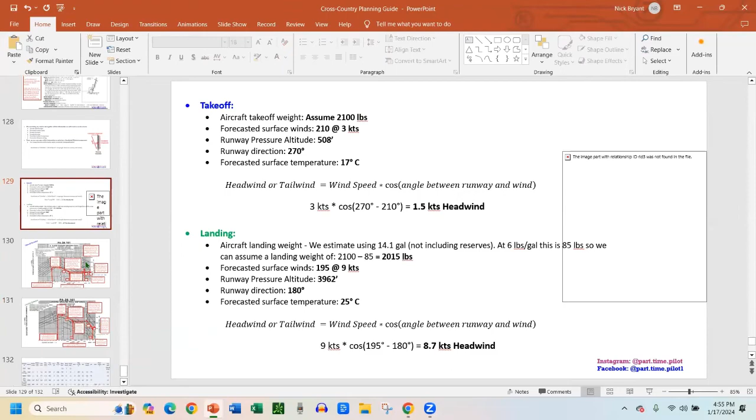So that's what I'm doing here. I'm using trig functions to come up with the headwind for takeoff and our headwind for landing. I'm just gathering all that information so that we can use these charts. So let's go ahead and do an example using these charts.

All right, so we're going to assume 2,100 pounds for our takeoff weight. That includes our fuel and all that stuff. And then we have forecast winds from 210 at 3 knots. Our pressure altitude is 508 feet. Our runway direction, we're taking off runway 27, so that's 270. And then 17 degrees Celsius.

And our headwind component, which we calculated using the chart - there's many ways to calculate crosswinds, and we have a video on this on our YouTube. You can go check it out, or in our lessons. Again, I don't want to spend time here, but I like to use the trig functions. It's just easy to me because I'm kind of a math guy.

So we calculated 1.5 knots as our headwind component. That's not the total component. Obviously, the total component is 3 knots, but at that 60-degree angle from 210 to our takeoff angle of 270, that gives us a headwind of 1.5 knots. All right, so how do we use this chart? Well, it's very similar until we get to the end here.

All right, so we want to find our temperature of 17 degrees and draw a line up to our pressure altitude of 508, which is going to be about right there, because this is the sea level line, and the one that says pressure altitude is actually the 1,000-foot line. So we draw up to there.

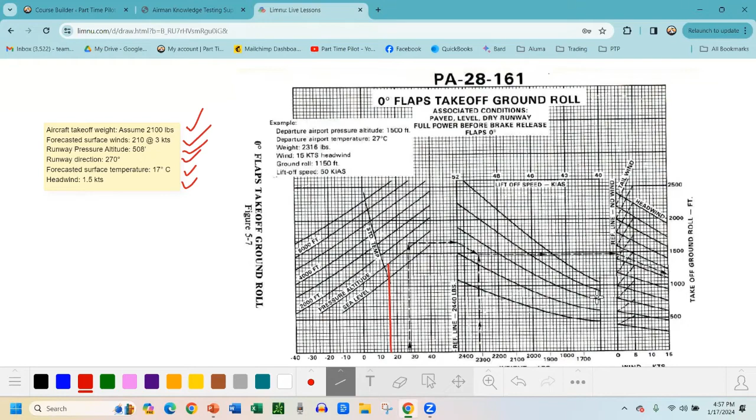Now the difference about these charts is they have these reference lines. It has a reference line here, and another one here. So what we want to do is every time we find an intersection, we draw a line over and stop at each reference line. We stop and then restart on this new section of the chart.

This next section is the weight, as you can see down here on the x-axis. So now we want to follow these curves to our takeoff weight, which is 2,100 pounds. Let's draw a line up from 2,100 pounds so we know where to stop. This is going to be tough because it's a curved line, but you essentially want to take your pencil and follow the closest line to you. It curves a little bit — I'm drawing a straight line, but you get the gist. Just follow the same trend of that line until you meet your weight line.

Then from that intersection, what do we do? Again, we draw a horizontal line all the way over to the next reference line, where we stop for the next section. This section is wind in knots, and you can see it goes 0, 5, 10, 15. Depending on what wind we have, it's going to affect our final takeoff ground roll.

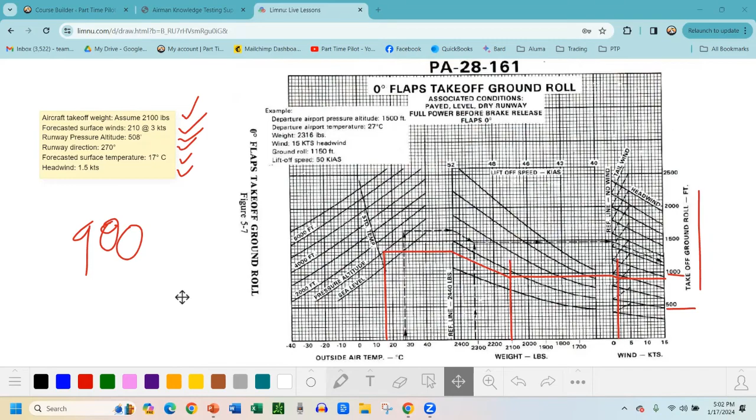So to finish it up, I know some of you might have to drop off, but we'd do the same thing for landing ground roll. The only difference is we want to estimate what our landing weight would be. We estimate how much fuel we'd use, not including reserve, and fuel is 6 pounds per gallon. So if we use 14 gallons, that's about 85 pounds. So by the time we land, we've lost 85 pounds, as long as no passengers were thrown out the window or whatever. So that's all we lost, and we can estimate our landing weight, then do the same thing for landing.

I'm not going to do it here, but it's the same process. I'll just do it real quick. So we got pressure altitude about 4,000 at 25 degrees Celsius. So boom over the reference line, about 2,000 pounds here. Not drawing straight lines, I know. So we'd go down to that, and come over to the reference line again.

This time our headwind for landing - our winds are 195 at 9 knots, and we're landing on 18, so it's almost a direct headwind. So we have a headwind of 8.7 knots, and headwind goes down, so we want to go down to about 8.7. So we'd go there and then draw that over, and that looks about like 520 feet to land. Again, assuming no obstacle.

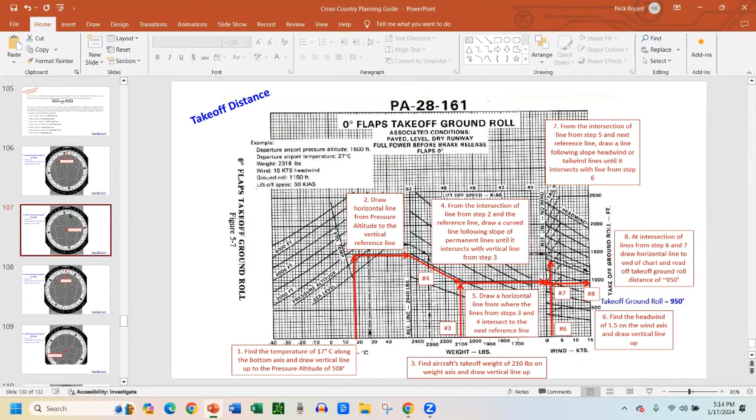Is this step by step in the Ultimate Private Pilot Test Prep book? I've just ordered it, it's not this whole entire detailed, but a lot of it is in there. You'll see just what you're looking at now on my screen. It covers each kind of calculation in the Ultimate Test Prep book, but it doesn't go in as much detail step by step as this guide does that's in our online ground school or our Checkride prep course. It does show each and every calculation, just not as much detail.

Oh Joe, no worries, it was a good answer. What's your opinion on practicing with a VR flight simulator?

Even the flight simulators that have simulated movements, like those Redbirds, even those aren't quite the real thing. But I will say those Redbirds do get, and the technology is getting better and better, that they can help with practicing maneuvers and landings and stuff like that. I used my Redbird to practice landings and it did help a little bit, but nothing's ever going to replace the real thing.

However, VR flight simulators, I think anything is useful, especially if it helps you. But if you actually take it seriously and you're not just messing around, you get out your kneeboard and actually chair fly with your VR simulator, use your checklist and go through the procedures, and maybe do some live ATC while you're doing it. All that procedural stuff, getting used to it, can be very, very beneficial, and it can help you when you've already done it and practiced it.